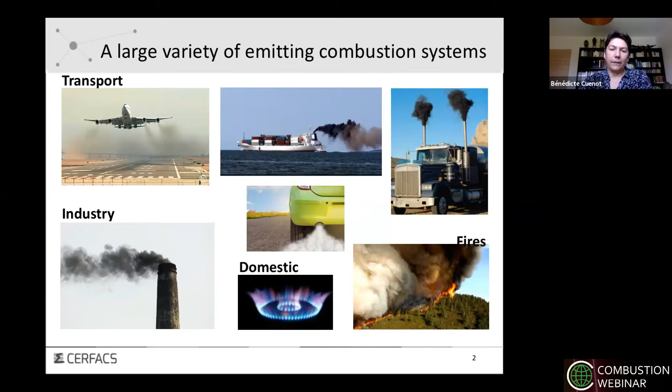We all know also the various environmental impacts. This is a point that I wanted to make today. It's probably clear for everybody, but just to make clear that in fact we have two types of emissions. There is one type that is more related to urban air quality, like nitric oxides, carbon monoxide, and so on. And we also have another important consequence on global warming and climate change. These are different topics, including different molecules—for climate change it is CO2, but also H2O to some extent. And of course soot is important for both aspects: it's a problem for urban air quality, but also for global warming.

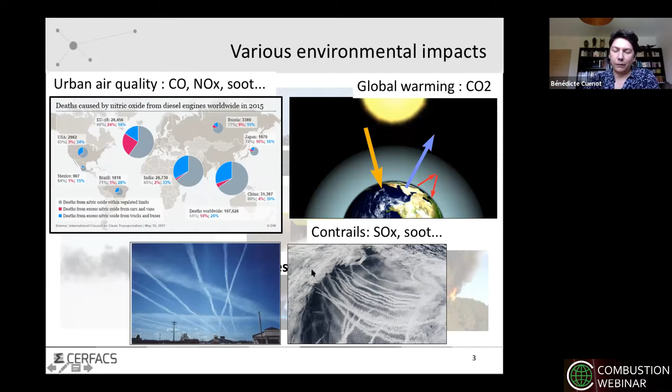Through what is called condensation trails, which I illustrate here at the bottom of the slide, you can see condensation trails from aviation here in the clear sky in the left picture. But something maybe not so well known is that boats—maritime transport—also generate condensation trails. As you can see here, I think it's the Pacific North Sea, you can see these traces typical of condensation trails. These condensation trails may increase sky covering and enforce radiation in the global Earth climate picture. So depending on what target, what type of problem we want to work on, we may have different solutions.

Of course, everybody works toward low NOx and low carbon, as we've seen—low NOx for urban air quality, low carbon maybe more for climate change. There are a lot of different technical ways to decrease combustion emissions, among which I tried to categorize a global classification. The first way is to work on mixing, how air and fuel mix together. It can be through staged combustion, as done for example for aviation engines, but it can also be through swirl or other types of injection strategies.

Another important way to decrease emissions is to work on the fuel nature. So, of course, H2—in France at least we hear a lot about H2 right now because it's no carbon, so it's very attractive. We also know it raises other issues, so it's not so easy to do, but it's considered. Ammonia is also very much discussed right now. And in a more conservative way, we also have a bunch of alternative fuels that have different compositions that may lead to decreased carbon emissions.

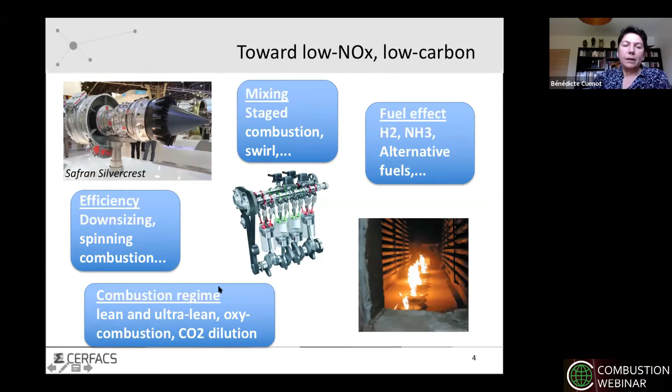So all these different techniques involve different physical phenomena that are in play in the combustion system, which I try to synthesize here in this slide.

Concerning mixing, the way you mix air and fuel is linked to the turbulent flow that is usually present in these systems, the flame structure, and the possible multiple combustion regimes it can lead to.

A major aspect, of course, is chemistry. We all know that just to predict something like flame length, you don't need very detailed chemistry to get a correct heat release rate, and so the correct flame length and shape. But if it comes to predicting pollutant emissions, that's another story, and you really need to go further in the chemistry description, and this is a major challenge.

We also have to take into account other complexities, like the fact that fuel in most systems is in a liquid state, leading to spray flames, and related physics like atomization and spray combustion, two-phase combustion.

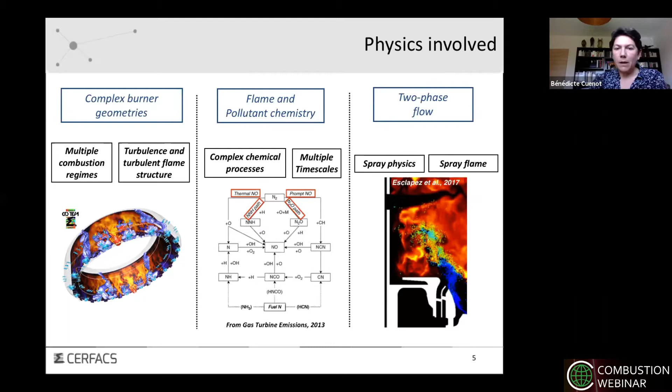So I will try to give an overview of what we do at CERFACS on all these physics and related modeling. One important aspect is that in our team, what we try to do is really obtain predictive trends. We want to be predictive.

We want to give useful answers to engineers. Useful answers mean either an accurate prediction or an accurate trend. This requires applying our models and simulations to very simple flame configurations, laminar flames, down to the most complex system, the true industrial system with all its geometrical complexity.

So it is very important for us to validate as much as possible on these more or less simplified configurations, with an intermediate level being lab-scale configurations where you still have good access to measurements for validation, but which are quite representative of the true industrial system, and then we apply this to the industrial system.

So this is what I will try to show in this lecture, how we develop and validate our models, to have confidence in giving correct solutions for true industrial systems. I will not show many true industrial applications because of confidentiality issues, but I will show a lot of illustrations in the first two categories.

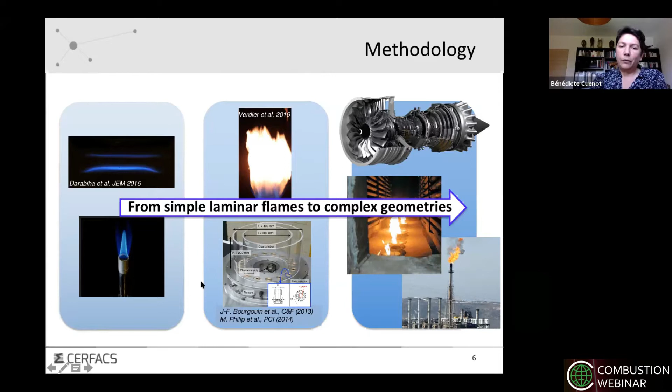All the simulations and results I will show today have been obtained with our in-house code developed at CERFACS, called AVBP, which has the necessary features to handle all these applications I've just mentioned. It is able to compute either external or internal flows.

It is fully compressible, because compressibility is a key feature for combustion instabilities and thermoacoustics, and it can work in both DNS and LES approaches. I will come back to that in a minute.

It handles complex geometries, so for that it uses unstructured meshes. It is highly parallelized with good efficiency. It is explicit in time with centered schemes to reach sufficiently high order, what we call high order—for LES, second or third order. And it includes a lot of models and numerical techniques, not all listed here, but I will give you an overview in this lecture today.

It has been applied to many different applications, all linked to combustion: gas turbines, piston engines, rocket engines, furnaces, and so on.

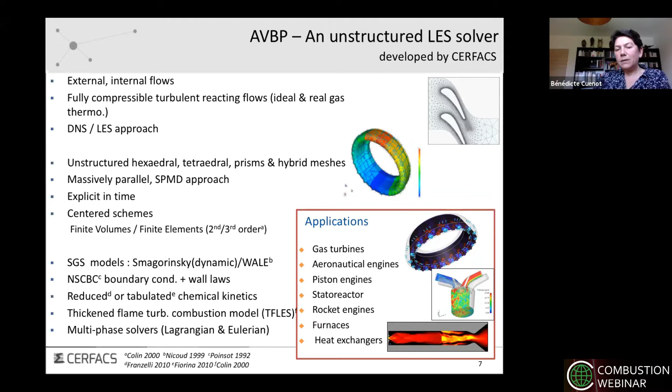So the first point we have to deal with is turbulent combustion modeling. The problem is the following: if we look at this image of a DNS, a direct numerical simulation of a turbulent flame, this turbulent flame has two kinds of scales.

We have scales related to the turbulent flow, as you all know—integral scales, Kolmogorov scales, and so on—and we have scales linked to the flame itself, the flame thickness and the flame speed.

And these scales allow us to describe the flame combustion, the flame-turbulence interaction, in this regime diagram shown below, based on two important numbers, the Damköhler number and the Karlovitz number, which make the ratio of these time and length scales.

Depending on the values of these two numbers, we can observe a large variety of combustion regimes, from very thin flame-let regime for high Damköhler numbers, to more homogeneous burning at the limit of well-stirred reactor for very low Damköhler numbers, which means slow chemistry with very fast turbulent mixing. So we need to take that into account to see first in which regime we are.

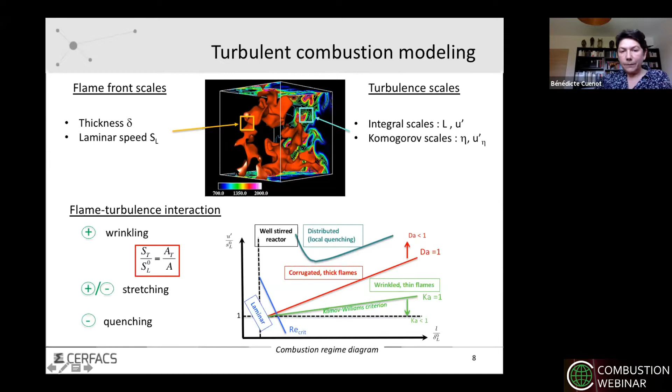Going back to the basics of turbulence modeling, I will not spend too much time on that because it's something that is now well established and known by the community.

If we plot the energy spectrum of a turbulent flow, we know we have a wide range of scales, which can be either fully resolved or fully modeled. In the averaged model approach, you model all the scales. In direct numerical simulation, you describe all the scales. And in large eddy simulation, you apply a filter at the cutting scale, denoted Kc, ideally in the inertial range, separating the scales you explicitly compute from the sub-grid scales that you model.

It has been well agreed in the community that for research purposes, the large eddy simulation approach makes a very good compromise between cost and accuracy. It allows you to simulate realistic flows and flames with sufficient accuracy in reasonable computing time, and for these reasons it's now widely used. Everything I show today will be in this framework of large eddy simulation.

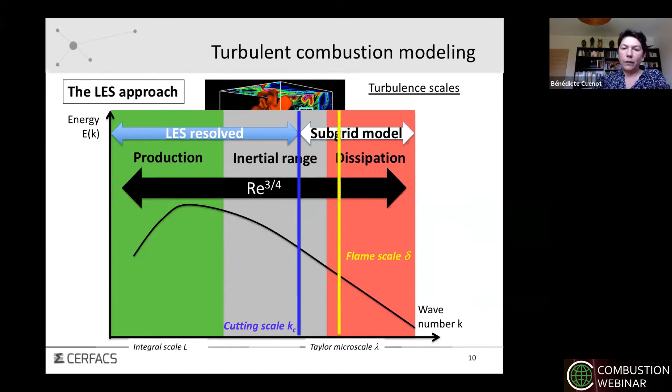I will not review all that today - it's not my purpose - but I want to show you one approach that we have successfully applied to many different systems, and this is the thickened flame approach.

In this approach, you take advantage of the fact that the flame thickness is proportional to the ratio of diffusivity to reaction rate, while the flame speed is proportional to the square root of the diffusivity times the reaction rate parameter. So if you realize that, and apply a thickening factor, so-called F, you can increase the flame thickness by a factor F while keeping the flame speed constant.

This is very interesting because it preserves the main property of the flame useful for design, which is the flame speed - this controls the flame length and burner efficiency. So this is something we really want to preserve, but the flame thickness is not something we need to preserve, and we can increase it to make it resolvable on the LES grid.

So with this trick, we are able to preserve the consumption rate of the flame, keeping the correct flame shape and response, while making it resolvable on the LES grid. This is a very nice feature of the premixed flames we used, and it allows us to resolve the flame front on the LES grid, even for flames with very small thickness.

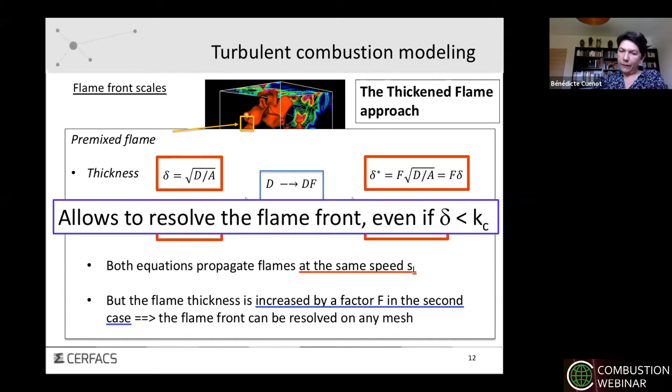This is typically what it gives you. If you apply that in a laminar flame case, you see here the temperature profile, in black for the real flame, and in red for the thickened flame.

You can see that the temperature profile is well smoothed down, so you have much increased the thickness. This is much less constraining in terms of resolution compared to the black curve.

If you look at the heat release rate, you have moved from a very steep and very narrow peak to a profile that is much smoother. But what is important to note is that these two curves, the red and the black, have the same integral, which means you have the same flame speed. This is exactly what is looked at, and this is what makes this thickened flame approach efficient for LES.

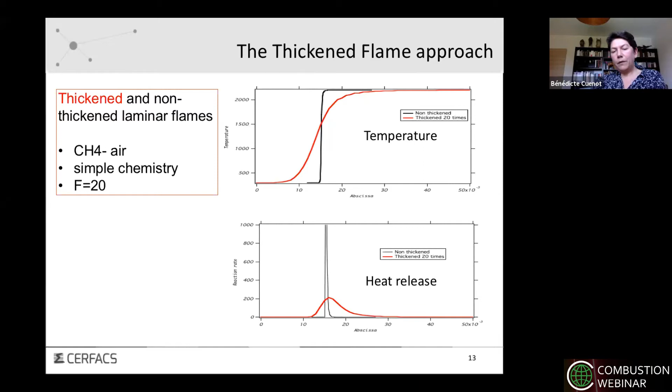Now you have not completely solved the problem, because in the previous slide I talked about the turbulent flame interaction, which is illustrated here. We see how much the turbulent flow wrinkles the flame front and then increases the combustion efficiency through this turbulent flame speed that derives from this wrinkling.

If you look at the thickened flame, like here, this is an example for a thickening factor of 5, you see that the flame front is much smoother. Of course you have increased the diffusivity, so this is expected. But going from F equal 1 to F equal 5, it's quite easy to see that you have lost a lot of wrinkling, so-called subgrid-scale wrinkling.

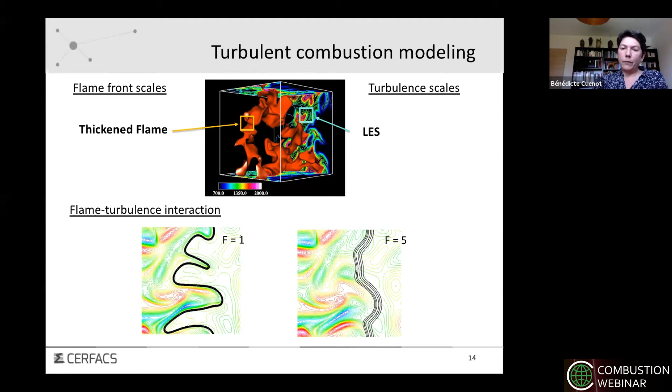So again, we need to do something about that. And this is where the efficiency function comes in. This is the other ingredient of the thickening flame approach, where you model the subgrid-scale wrinkling, the part that you are missing because of the filter and because of the thickening process.

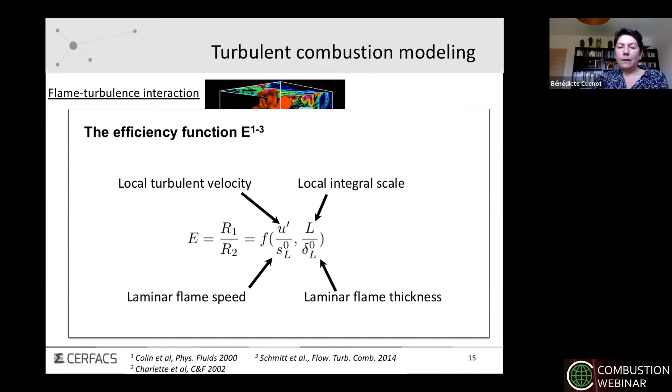You determine an efficiency function that is simply the ratio of the thickened and unthickened flame fronts, that you model with a function dependent on laminar flame characteristics and turbulent flow characteristics. I will not go into the details on how you determine this function and how it looks, but what is important to remember here is that you apply this efficiency function to, again, the same quantities.

Diffusivity and reaction rate. Note here that you apply them differently. The diffusivity is multiplied by the efficiency, but the reaction rate now is also multiplied by the efficiency, because of course the turbulent reaction rate increases, since you want to increase the flame speed from laminar to turbulent value. And this is what E does here.

So now you have a complete model that is able to resolve a turbulent flame on your LES grid to recover the correct turbulent flame speed. But then you have to make sure that your simulation is correct also outside the reaction zone.

If you apply this F and E everywhere in your computational domain, you know that in non-reacting zones, if there is mixing, then if you apply this diffusivity correction, you will diffuse too much. So it's very important to apply these two factors only in the reaction zone.

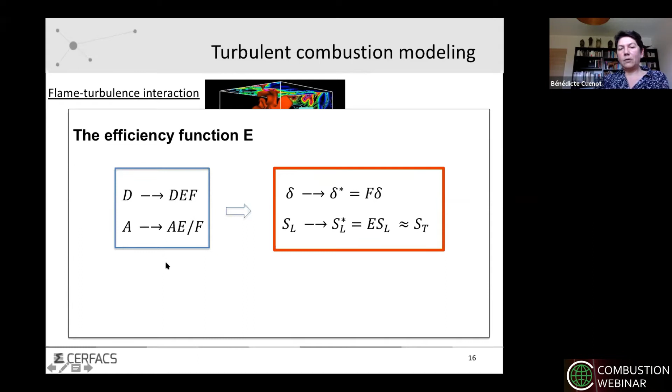So this is where the dynamic thickened flame model arrives. You apply this F factor only, and also the E factor only in the reaction zone. This reaction zone is identified with a sensor S, which is able to exactly identify where you have the flame front, and then you apply this thickening only at the flame front location.

The final equation that you get in your CFD solver is the one here. For example, for a mass fraction, you see that you have the E and F factors and the sensor here. You don't need the sensor for the reaction rate because it naturally goes to 0 outside the reaction zone. And you see that you apply the E and F only where the sensor is equal to 1.

And if the sensor is equal to 0, then you can easily find that you end up recovering the standard LES equation for transport of scalars in a turbulent flow, with turbulent diffusivity here.

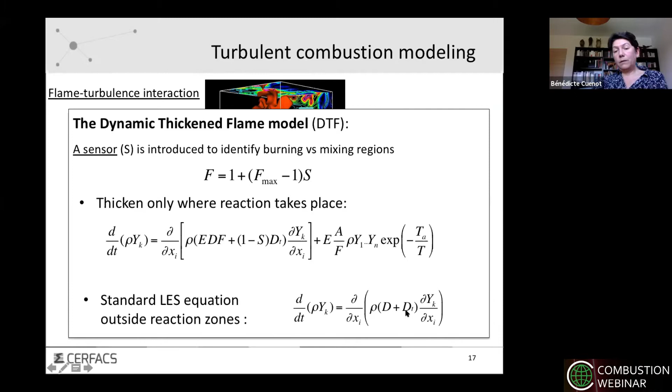Now, how can we obtain this sensor? This is a very tricky part of the model that is not so much talked about or discussed in the literature, so I take the opportunity today to discuss that a bit.

It is not so easy to find a universal, let's say, definition of the sensor, because if you think again about the complexity of the flames that we can have in real systems, with complex fuels, complex chemistry, possible liquid fuels with droplets, varying equivalence ratio, and so on.

Determining exactly where the flame front is located is not so easy. So we have recently developed a technique, an algorithm that is able to automatically detect the flame front in any kind of simulation, and also determine the correct thickening that has to be applied. So how is that done?

It's based on two ingredients, let's say. The first step is to identify the location of the flame front. This is quite easy to do if you realize that the flame can be identified with some kind of shape of the profile of some quantities. Typically, this could be the heat release rate or fuel consumption rate also. So this particular shape of this source term is clearly a marker of the presence of a flame.

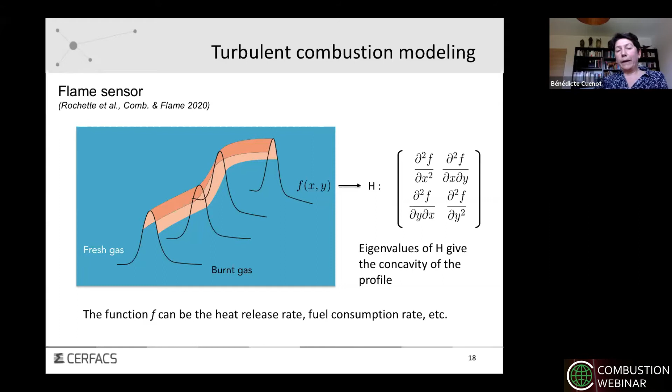And what you want to detect is the maximum of this function, to locate the position of your flame front. To do that, if you accept this assumption that the flame front is located at this maximum of this function, it is quite easy to identify by simply calculating the Hessian matrix of the function you have chosen, the matrix of second derivatives, and realizing that the eigenvalues of this matrix give you the concavity and the directions of concavity of your function, therefore giving you an indication of whether you are on a peak or not. So by simply calculating this Hessian and taking the eigenvalues, you can identify where your flame front is located.

Then the second step of the automatic thickened flame model is to determine the thickening factor. For that, again, we want to rely on the simulation itself rather than a priori values of the flame thickness, because if you think of spray flames or non-homogeneous equivalence ratio or other complexities in your configuration, there is no such thing easy to define as one flame thickness. So we thought it would be more accurate to rely on the flame thickness evaluation that you have in your simulation.

So once you have detected your flame front, you can look at the transverse profiles of this flame front. This gives you this kind of shape. Again, this is an F function, so it can be a heat release rate or any other source term that you choose to mark your flame front. From that, you can calculate a thickness.

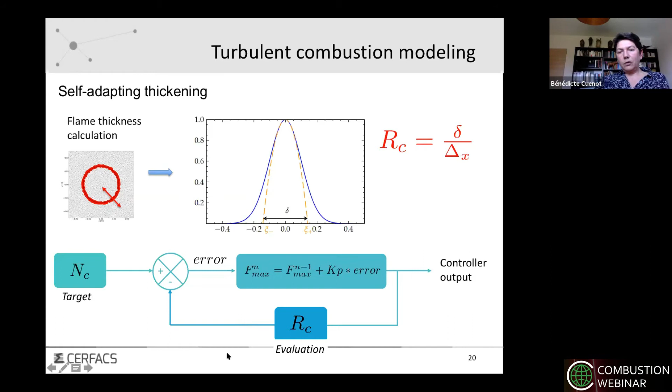I will show you an illustration right now. So we first apply this algorithm to the Volvo case. Maybe some of you know it.

It's just a flame stabilized behind an obstacle, like illustrated here. It's a configuration that has been computed by many groups. It's quite well known, and this is what you get.

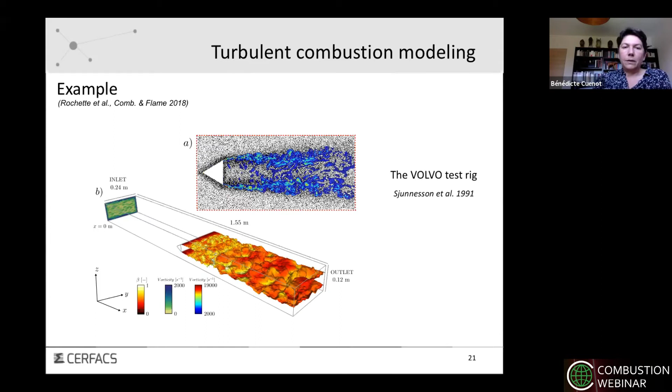This is the front detection. You see that the algorithm, this is a result of the eigenvalues of the Hessian matrix. You have the points here that are identified by this algorithm, this Hessian matrix, and it follows quite well the reaction rate.

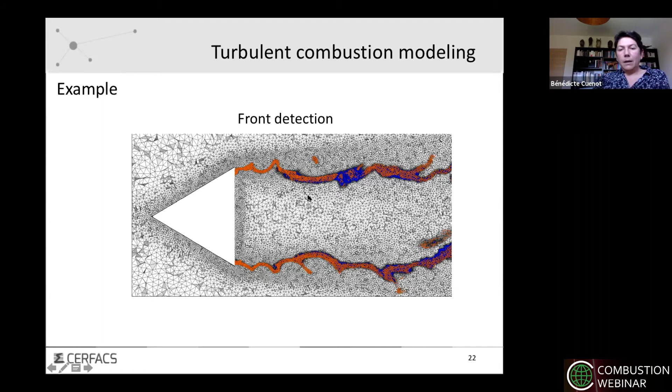And this is the thickening that has been obtained automatically. The user only asked for 5 or 6 points, I don't remember exactly, but this is the order of magnitude to be inside the flame front. And then the algorithm automatically found the right value of the F factor to satisfy this resolution constraint.

So this is something that is quite recent, but it's really improved a lot our results, especially in the case of spray flames, because spray flames have very different behaviors compared to gaseous flames, and there is no such thing as one thickness or one flame speed for a spray flame—or there is, but it is not easy to know a priori. So it is very important to have an algorithm that is able to identify this value by itself without any input by the user.

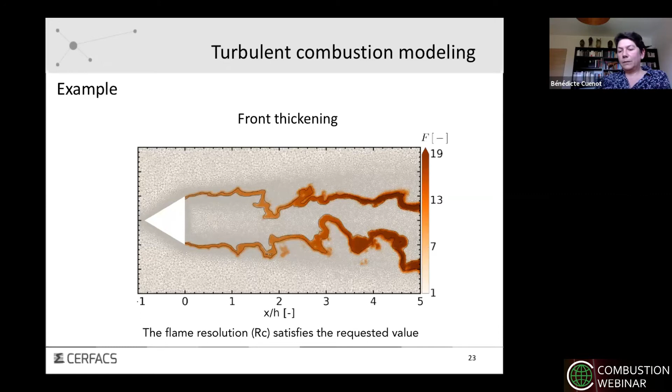This is another case. I told you at the beginning that we validate our models on a series of test cases. The Volvo case I showed before is a very simple case. This is a more realistic case, the SGT 100 case that has been used by many groups for validation, but it has more complexity, in particular swirl flow as found in real engines. It is important to check that the algorithms work well on this kind of configuration.

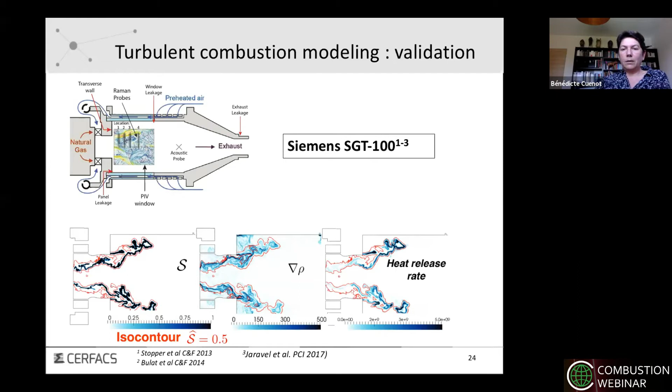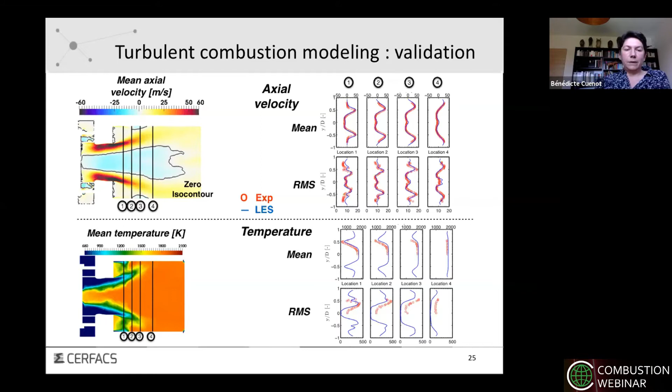So you can see here the sensor following well the heat release rate. This is something that has been well established right now. Just another illustration of the validity of the whole concept, where you can see velocity, but also temperature—excellent agreement between measurement and simulation. So we are now able to reach a quite high level of accuracy on this kind of boundaries.

Now I come to the very big challenge of chemistry. As I told at the beginning, we are not satisfied with only having the correct flame speed of a flame. We want a detailed, at least some chemical description that gives us access to the pollutants, because this, as I mentioned at the beginning, is a major preoccupation now.

So the slow time scales may be an issue for modeling, but maybe not for numerical robustness and stability. But we also have scales that are much smaller than the flow time scales, which means that if you are in an explicit integration scheme, you need to reduce your time step drastically to resolve these scales. So this is a true difficulty.

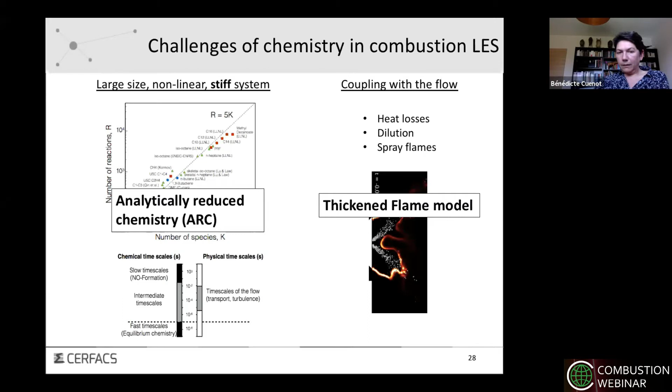And for that, we have applied this reduction approach, which is called analytically reduced chemistry. It has been developed for a long time by people from chemistry, and it allows us to obtain reduced schemes that are still quite accurate, and in which you reduce the stiffness. I will give a short description of that now.

You can find the details on this website, where we provide reduced schemes to the community. You can find download schemes there. The idea is to derive reduced schemes from a detailed mechanism.

And then we apply this quasi-steady state assumption, which eliminates the very stiff species. So it has both advantages: it eliminates species, reducing the size of the system, and it also reduces the stiffness. This is exactly what we want for our simulations.

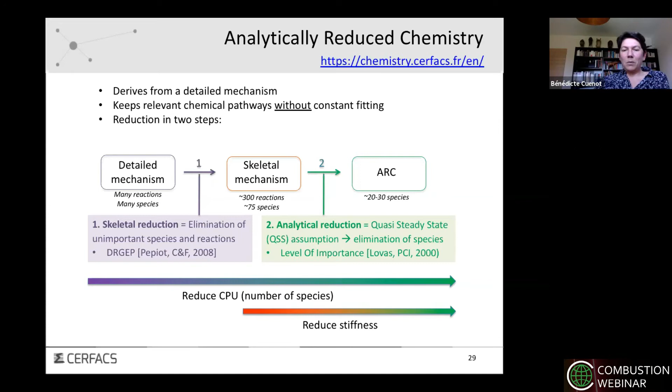So the good news is that you can do that automatically. Again, as I said, we're not chemists, so we don't know so much about chemistry, but these algorithms that we took from the literature are very autonomous in a way. They do the good job by themselves. They're able to automatically apply the DRGEP mechanism, determine the least important reactions and species, and then also determine the quasi-steady species.

So we have implemented that in a code that we call ARCANE, that makes this reduction automatically. It is linked to Cantera for the associated flame calculations. And then the user just has to give a detailed chemical scheme and give some targets like flame speed or some species or temperature profiles.

And also give his own tolerance on this target. And then the code does the whole job, and provides you a reduced scheme automatically.

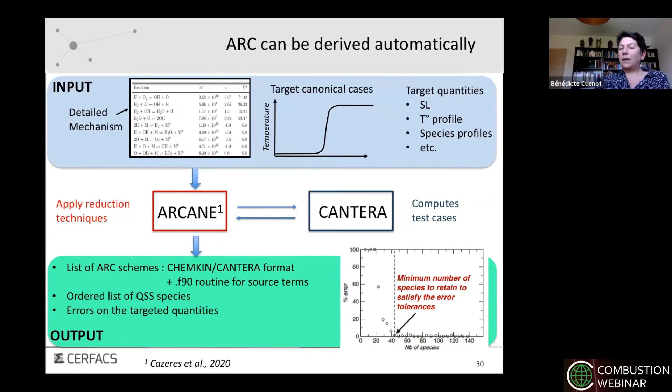Okay, there is not much uncertainty on this, and this is my understanding of why the automatic procedure works so well. It's because it's quite clear when you have dropped a species that is too important. Mathematically, it is quite clear to determine. So that's why the algorithm has no difficulty making it.

We have applied this approach to complex fuels. This is work that has been done in the framework of a European project, JetScreen, to see fuel effects. I chose illustrations here on some projects that are, of course, linked to emissions, because this is the main topic of my talk today.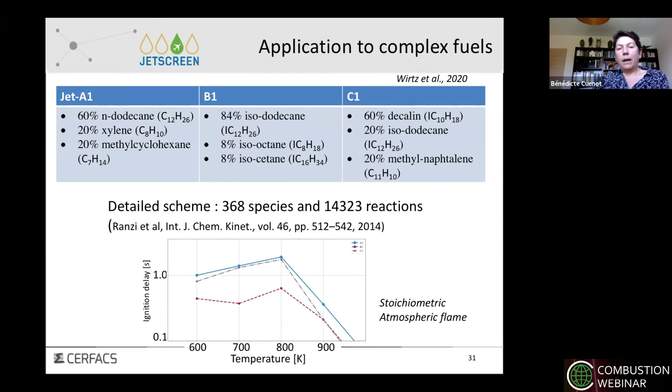These results on ignition delay have been obtained with a detailed chemical scheme that comes from the University of Milano. Then we applied our Arcane code reduction algorithm to that, and this is what we obtained.

So we quite easily obtained, even for these three-component surrogate fuels, reduced schemes that were not too difficult to obtain. You see, we went from 368 species to only 36, with, of course, quasi-steady state species, and a reduced number of reactions for Jet A.

And with a good prediction of ignition delay and flame speed. But also for the B1, where we end up with about the same order of magnitude of species, about 31, with also good agreement between the detailed and reduced schemes in terms of ignition delay and flame speed.

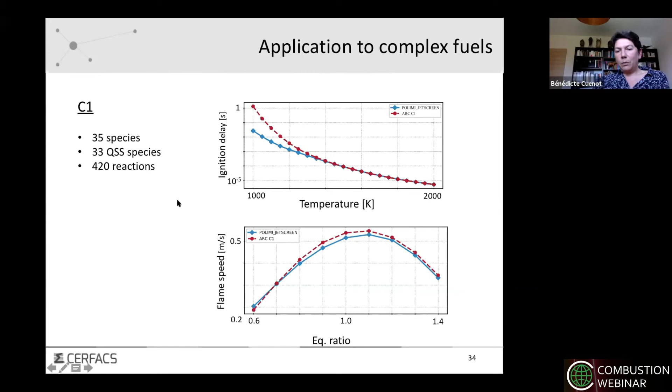And finally, for the C1, which is a bit more complex. You see that we have more difficulty matching the ignition delay for low temperature. So C1, in our experience, was a bit more difficult to handle, but still we had something satisfactory. And then we could apply these reduced schemes in a configuration that comes from DLR.

You have an illustration here of a standard swirl flow, swirl flame. What I wanted to show here today was this plot, where you have the temperature at different heights for the A1 and B1 fuels.

You see that we can recover this if you compare with experiments. Experiment is here in the blue circles and empty circles, blue circles and red square, to be compared with the full filled blue circle and red square. You can see that we're not exactly on the curves because there are other uncertainties, in particular linked to the liquid injection, but we could recover some trend of the fuel effect with an increase of the temperature.

With the fuel, so this is very encouraging, and these are very small effects. Even in the experiment, they are very tiny effects, but we were quite happy to see that our chemistry was able to recover this trend.

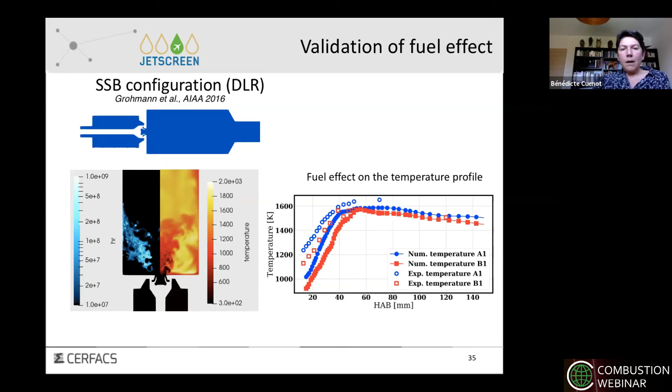Now I will go to, I think I have to speed up a bit, to two-phase combustion. Two-phase combustion is very complex because it involves a whole bunch of new physics like atomization, injection, evaporation, interaction with wall, and of course turbulent dispersion.

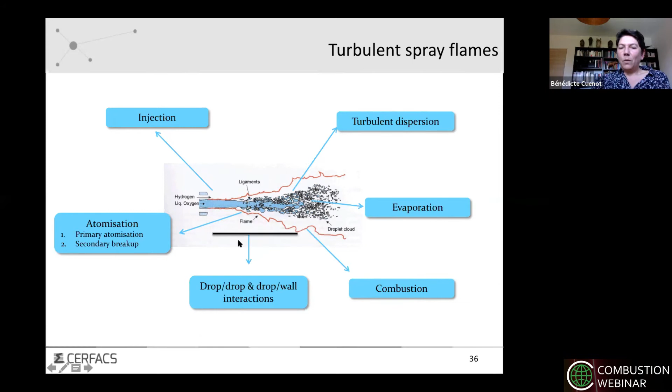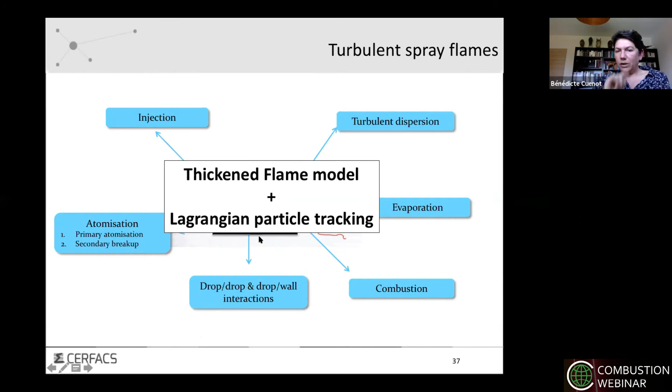So again, we still want to apply our thickened flame model here, but we now add a Lagrangian approach for the particles, for the droplets.

It is important to really capture important effects in turbulent spray interactions. This is illustrated here with this animation of droplets transported in a homogeneous isotropic turbulent flow, where you can see that there is a tendency of the droplets to concentrate in low vorticity regions. This is very important to capture in a turbulent flame computation, because it means the fuel will be concentrated in some particular zones of the turbulent flow.

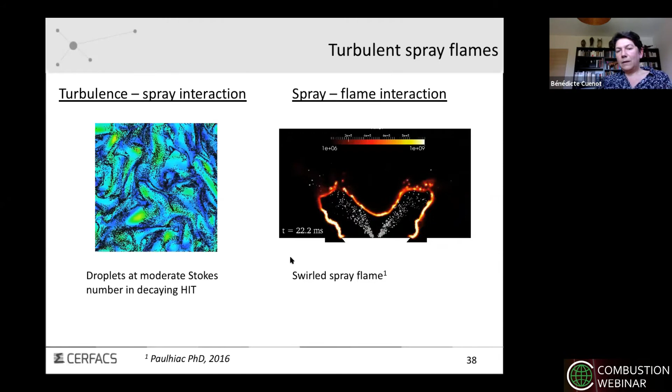Another nice illustration of the complexity of turbulent flames is given here, where you can see a spray interacting with a flame front. You can see how some droplets evaporate before the flame front, ahead of the flame front, to feed this flame front, but some are able to cross the flame front, and some also burn as individual droplets in the burnt gas zone. So this is a very complex flame structure that has to be represented.

To go back to modeling, one important thing is the question of what is the laminar flame speed of a spray flame. Fortunately, this concept still holds for spray flames, you can still measure a flame speed for any kind of spray flame.

But what is interesting is that in the rich zone, you may have a flame speed that is higher compared to gaseous flame speeds, which is maybe not so intuitive, because you would say that evaporation introduces a delay, so you would expect lower flame speed.

And this is exactly what the Ballal-Lefebvre correlation, which is much used, says. This correlation just introduces the evaporation in the picture, and then always gives you a lower flame speed. So this correlation is good for the lean zone, but not for the rich zone.

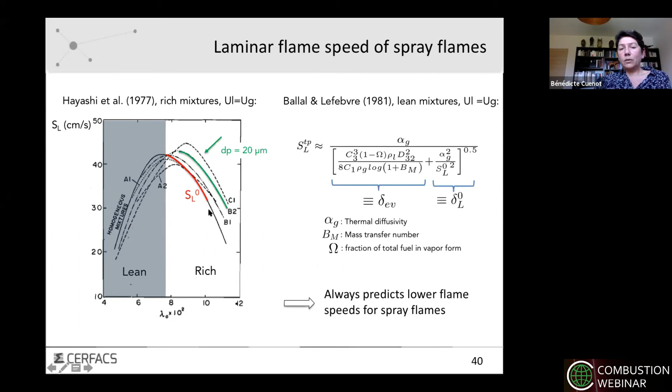This can happen in very rich cases, or depending also on the diameter of the droplets. The evaporation is not complete, which means that the equivalence, the fuel amount that the flame burns, is not the fuel amount that you feed the flame with.

And if you are overall rich, and go back to the flame speed curve with equivalence ratios, you see that you move from a very rich point, your nominal equivalence ratio, but what the flame sees is a lower equivalence ratio because again, the fuel has not fully evaporated before the flame front. Therefore, the flame speed increases because you come closer to stoichiometry.

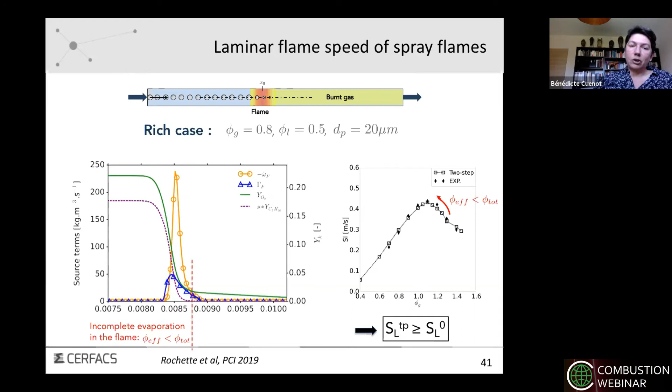And this is exactly what happens, and this is what explains the higher flame speed in some situations in overall rich spray flames. Once we realized that, we proposed a new correlation for the flame speed of this spray flame, where we introduced an effective equivalence ratio, taking into account the fact that you may not evaporate the whole liquid before the flame front.

If you look at the comparison of flame speed obtained, measured from simulation and taken from the correlation, you see that we have a good match in the lean case, which is also not so bad for the Ballal and Lefebvre correlation. As I mentioned, for lean cases this works well. But for rich cases, the correlation is really able to describe this increased flame speed, when evaporation is not so fast.

You can also see another feature that we have studied here, which is the impact of the slip velocity between the droplet and the gas, because this also impacts a lot, of course, the amount of evaporation inside the flame front. It has a lot of impact on the flame speed, but I will not go into details into that now.

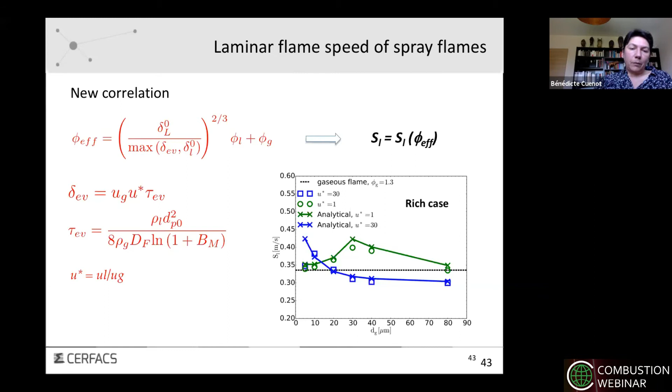The main message here is that the flame speed of a spray flame is not something that is easy to determine a priori, and for some modeling approaches it can be a difficulty.

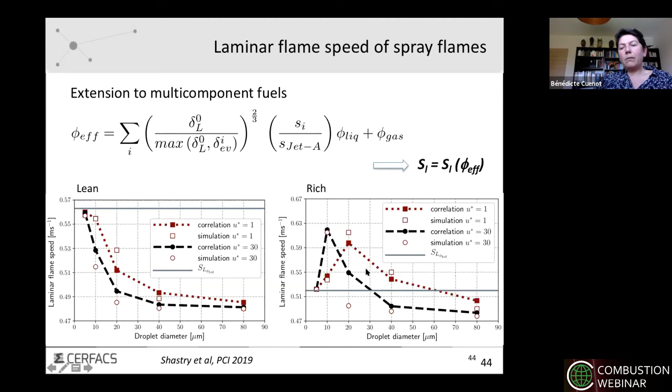We extended this correlation to multi-component fuels, typically those that I showed previously. You just take into account that you have several evaporation characteristic times, and you can see that again you have, also for rich cases, this increase of flame speed, and the correlation is able to capture it.

Now, how should we apply our thickened flame approach model to spray flames? The issue is the following: we have in a spray flame evaporation and reaction, and the balance between these two gives you the final flame structure.

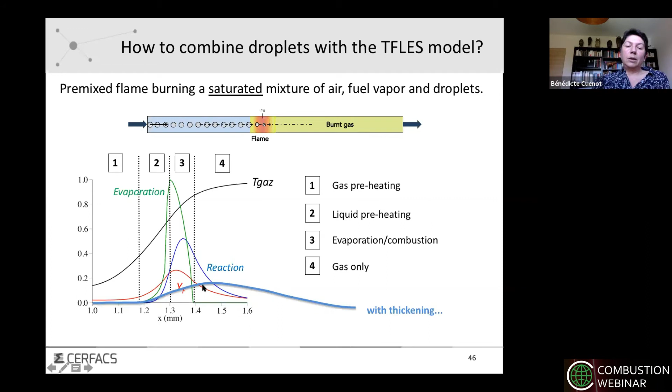Now, if you apply thickening to the gaseous part of the flame, the reaction zone is modified as shown here, and you see that the relation between evaporation and reaction changes a lot. So this means that you have to do something about evaporation also, and this is illustrated here.

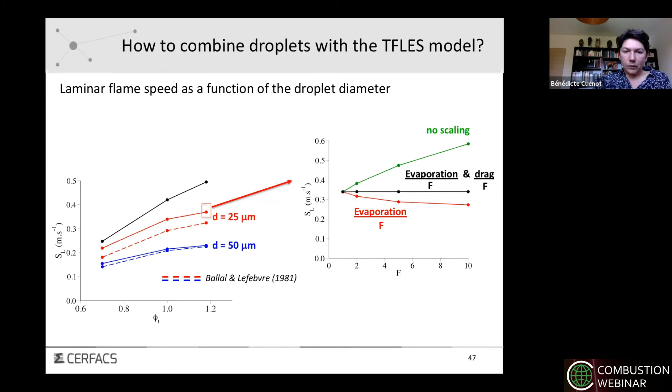So this means that when you do spray flames, you also need to apply the thickening to the exchange terms between the two phases. This is also an important note for this modeling system.

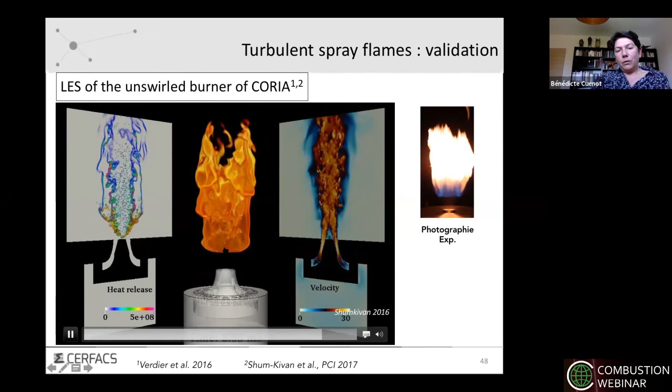So with that, we are able to compute spray flames like this one shown here, which is a test case from a configuration from CORIA that has become a test case. Many groups have computed it, and with this approach we're able to obtain the correct flame structure and flame liftoff. We are able to really go into much detail in the flame structure, and in particular the way the spray flame is stabilized with various zones, describing the very complex spray flame structure.

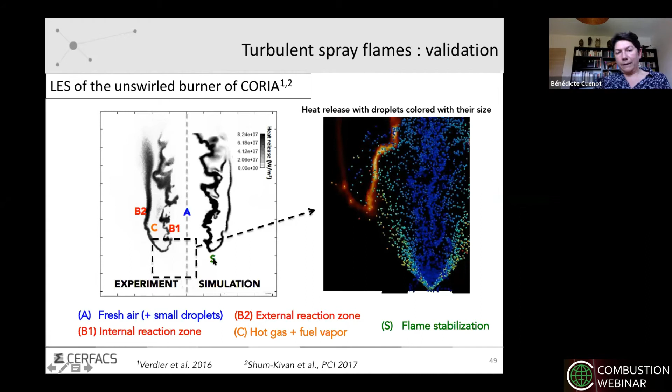Where, for example, in zone A here, you have air with small droplets that behave very differently from zone B2, which is an external reaction zone with a lot of pre-evaporation and so on. You see this really specific flame structure is well recovered by the LES with the model that I have just presented.

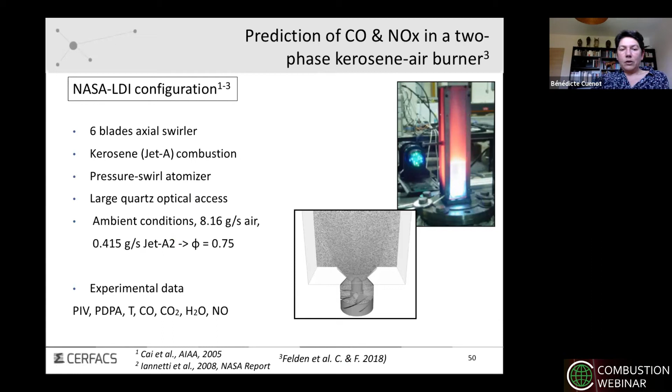So with all this, we can predict emissions. Just an illustration on one configuration, another LDI configuration which you can find in these papers. Again, it's a swirled flame with kerosene, on which there was some nice measurement of emissions, CO, CO2, and NO. So we applied our thickened flame approach with a Lagrangian solver for the droplets and chemistry, analytically reduced chemistry.

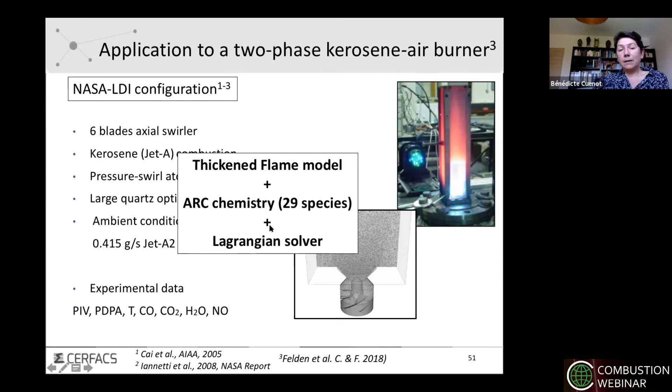This is just to show how it looks like. This is quite standard, a swirled spray flame. This is to show some validation in terms of temperature and products. You can see here already the CO profiles at various heights above the burner, and you can see the good prediction of the CO.

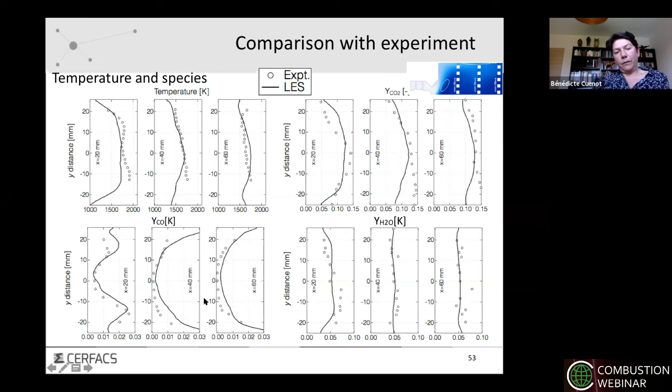It was interesting also to go into more detail in this CO field. In particular, we could see that this particular shape of the CO, with some peaks here around the sides, was really linked to some particular chemical processes that occur close to the cold walls. This was very interesting to observe, and only our thickened flame approach with explicit chemistry naturally captures it, without any further modeling.

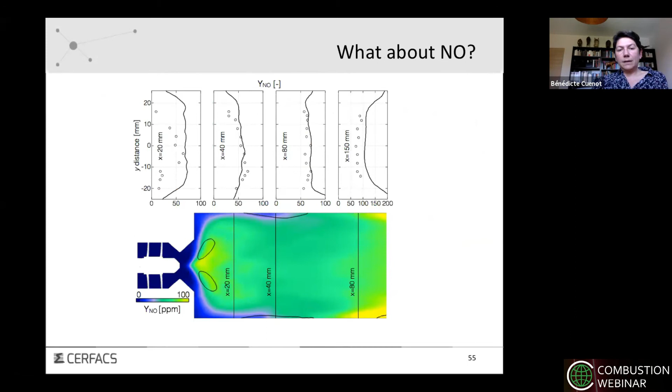For NO, again, we had also a nice comparison, so we were quite happy with these results, demonstrating that with the model I have presented, we're able to predict these pollutants. I will go now quickly.

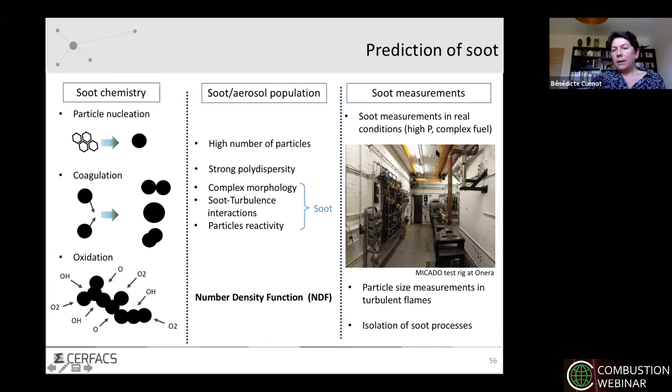We also know that we need to describe the soot particle population because we have a high number of particles, which can be a difficult challenge, and we have a strong polydispersity. So this population is usually classically described with a number density function. And of course, soot measurements are a key point in our approach.

The only thing I want to show today is that it is possible to predict soot with the Lagrangian tracking approach. You can find in the literature a lot of work on sectional methods or methods of moments to describe this soot population, the idea being that describing the trajectories of all soot particles would be too costly. In fact, we have developed an algorithm and methodology that makes Lagrangian tracking more computationally efficient than sectional methods or methods of moments, if it is to correctly capture the soot particle size distribution. We took chemistry from the literature without detailing it too much, and mostly developed this Lagrangian approach.

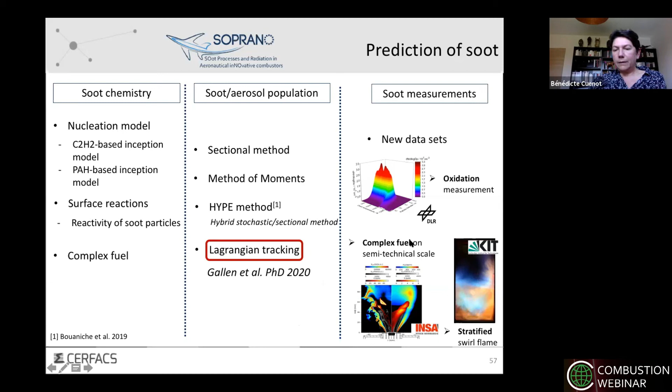I want to also mention the Soprano project, a European project, in which new data sets could be produced that could be interesting for the community to better characterize soot oxidation and the complexity of soot evolution, and also the sensitivity to the fuel nature.

I just want to say a word about the Lagrangian tracking. There are two main points to consider. The first is about collision. You cannot describe all individual collisions between pairs of particles because it would be too costly. So for this part we use a stochastic algorithm. This is quite standard, a stochastic algorithm for collisions that you can find in any code for simulating droplet or particle populations.

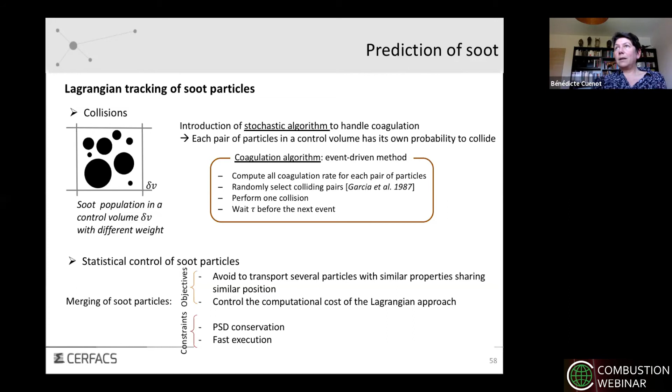The other important feature is to control the statistical convergence of your population. You have to make sure that in each cell of your simulation you have enough particles to be statistically converged and get correct results without increasing your computational costs too much. This means you have to apply merging and splitting procedures to control the number of particles per cell that you want to keep in your whole simulation.

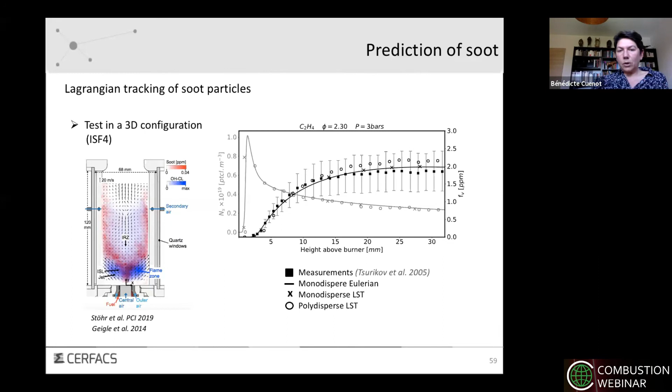With that, we were able to make predictions of soot in the burner from UTIAS, which also uses Jet A1 as a fuel. In that case we have two kinds of populations: droplets for the fuel and soot, so you have to distinguish between these two. We also had to adapt the chemical description because we had the complex fuel Jet A1.

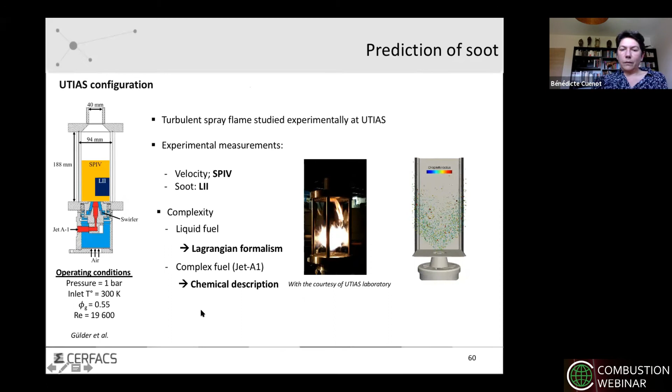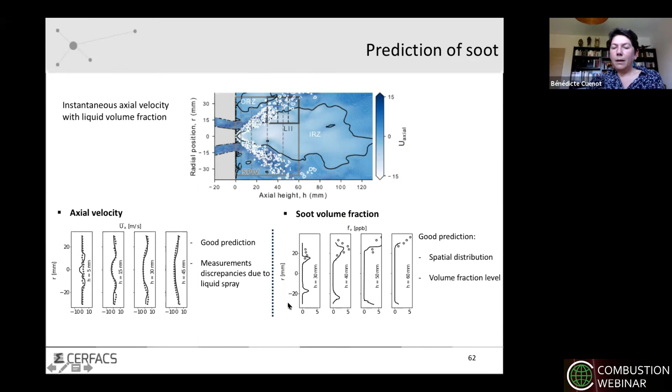The lines are the prediction, the simulation, and the symbols are the measurements. You can see that we were able to obtain the correct location and levels of soot. So these are very encouraging results.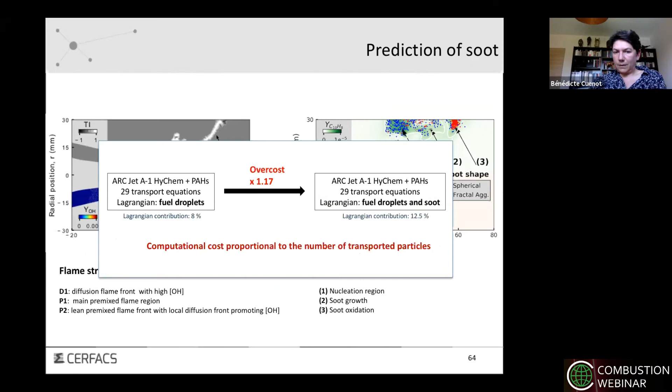In terms of computational cost, we could observe that the Lagrangian approach, if you do it with the correct and efficient handling of the numerical particles, has a very small overcost, much smaller compared to any method of moments if you want to capture the correct particle size distribution. So this was quite satisfactory also.

So now it brings me to the conclusions. Just to conclude, we have a methodology based on large eddy simulation, including semi-detailed chemistry, a Lagrangian approach for the liquid fuel and soot, that is able to describe turbulent, gaseous, and spray flames, to predict pollutant emissions, and also transient behaviors that I will illustrate just after, in complex geometries.

From that, it is possible to couple these simulations to other physical effects like thermal radiation, conduction, or electric fields, or whatever. So this is something that will probably come in the future.

Of course, we still have to work on some aspects. Typically, soot chemistry is something that is still far from being sufficiently known, but we have the tool to include more accurate or more detailed soot chemistry in the solver. Multi-component liquid fuels still remain to be studied. We are just at the start of it, as well as the reduced chemistry for fuel blends.

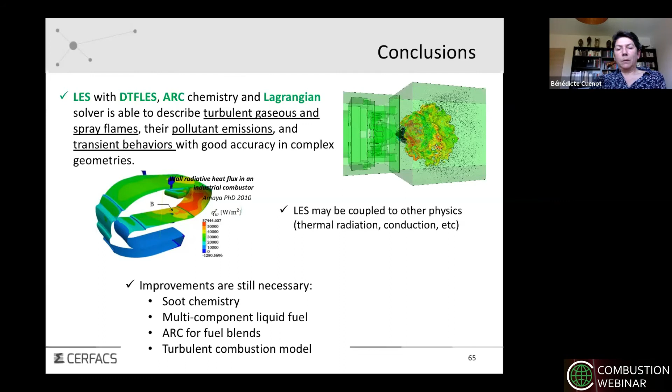We also need to continue the work on turbulent combustion modeling, because you may have noticed that when I spoke about the thickened flame approach, I spoke mainly about premixed flames. But we know that with the change of fuels, typically if we switch to hydrogen, we may see more non-premixed flames, which also happen more in spray flames in 3D complex geometries.

Just to finish with a nice movie, I wanted to show what LES allows for transient cases. This is an ignition of a spray flame in an annular burner, a lab-scale annular burner. So this gives an idea of what can be done.

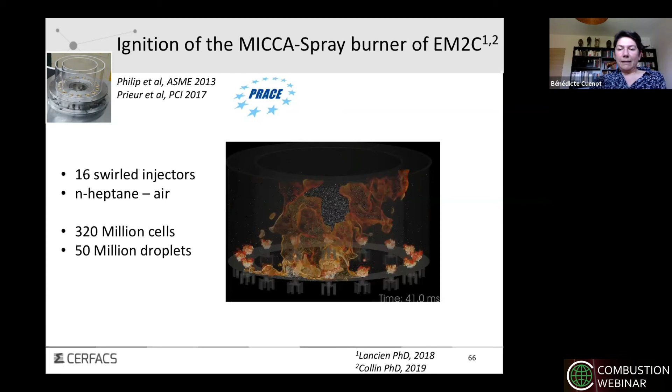You can see the simulation nicely reproduces the flame propagation to the whole burner. This is very important and very interesting for application. It does not give only a nice movie, it also gives quantitative good results compared with the experiment. The images here compare the simulation and the experiment at the same time, and here in this plot you can see the time of ignition of all the different burners, and you can see that we have a very good match.

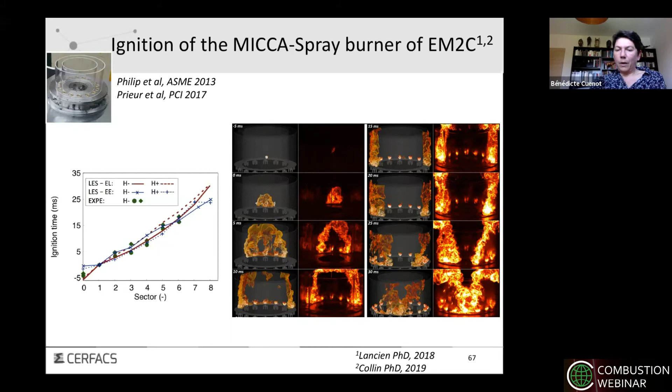So these tools, this LES approach with all the models that I mentioned, are very powerful and open the way for many, many studies of different situations.

And this ends my talk for today.

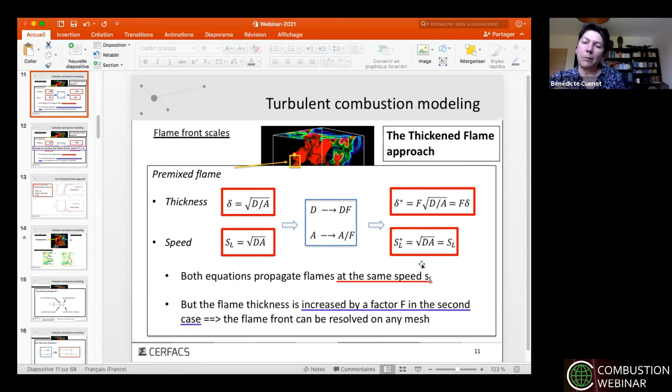This is something we found very useful, because with this transformation, you can do your computation of the flame on your LES grid, and it will be stable numerically, it will be resolved. Then, of course, when you do that, you have not correctly modeled the subgrid scale effects - the fact that you have some smaller scale interaction between the flame front and the turbulence.

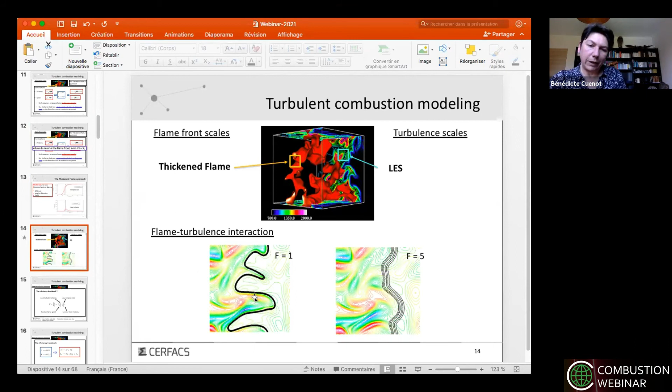This is where the efficiency function comes in, which allows us to recover what happens at the subgrid scale, and you apply that again to these two quantities, D and A. So you can show that this efficiency acts again as an increase of diffusivity, like turbulent mixing, and also increases the reaction rate because the wrinkling increases the turbulent flame speed compared to the laminar flame speed. This is exactly the role of this efficiency function.

So, is that clear enough? Yes, I think that is enough. If you want to know more about this, I think we can refer to our website where you can find publications where all these models have been presented.

The next question is from Professor Jay Gore. The first question is still on the thickening flame model, actually in its application for spray flames. The problem in spray flames is that you have multiple equivalence ratios, so you have partially premixed combustion. How do you handle that in the thickening flame model?

Linked to this question, there is also another question from Professor Gore: do you observe double flame structure in spray flames? And is the thickening flame model able to correctly capture these complex flame structures?

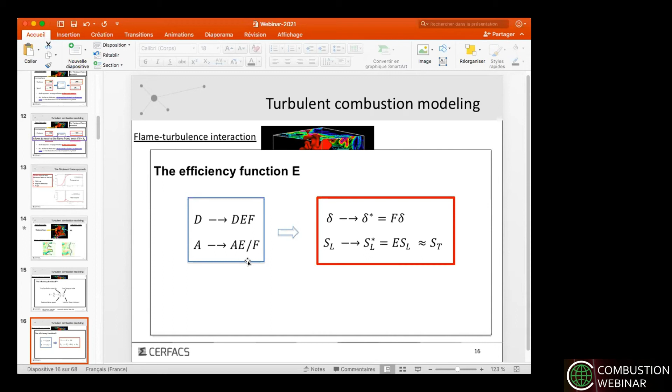So, in fact, the thickened flame model has no difficulty in describing spray flames because combustion always occurs in the gas phase. Imagine you have droplets, they evaporate, then you have a heterogeneous equivalence ratio - no problem, the thickened flame will see it. You don't need to do specific treatment for that, provided you have correctly determined the thickening factor, as I just showed in my presentation.

So does it capture the rich flame and the lean flame you described, a double flame structure? You mentioned there were two different flame speeds, and sometimes the flame speed was faster than the speed corresponding to the overall equivalence ratio. Is that complexity captured by the thickened flame model - that sometimes there can be two different flame speeds, one faster than the equivalence ratio of the mixture?

Yes, exactly. This is the advantage of the thickened flame approach, because you do not pre-assume the flame structure. You just thicken the flame front, but then you keep the reaction source term. So if the reaction source term sees a rich zone locally, it will burn as a rich zone, and in the neighboring cell, if it sees a lean zone, it will burn as a lean zone. So yes, it effectively captures this very interesting effect of spray on the flame speed.

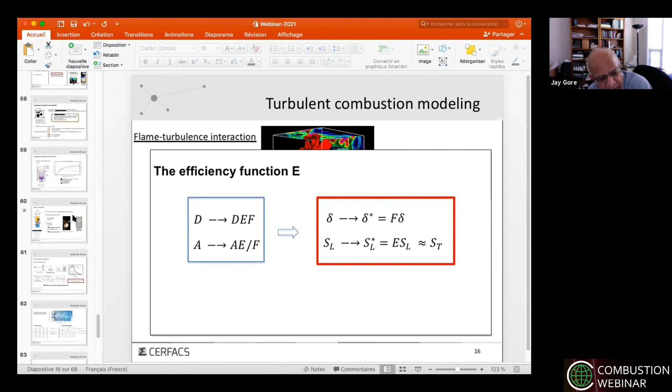This was related to the soot, and I noticed that the measurements of the soot in one of the very late slides showed parts per billion level soot volume fraction, and then in the computation slide, it showed parts per million. So I just wanted to understand if the resolution for measurements as well as computations is at the parts per billion level or at the parts per million level.

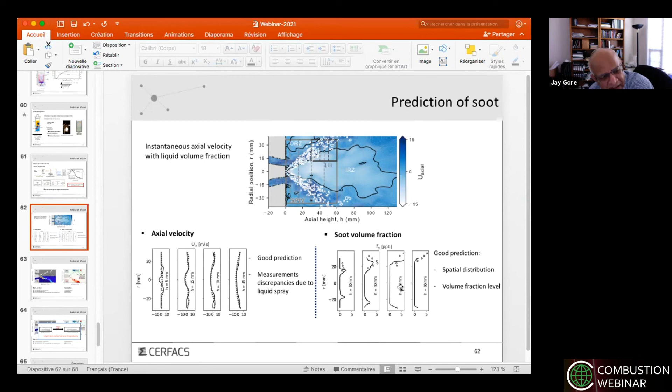In that case, it is part per billion. Yeah, so the computation and the precision of the measurements is in the parts per billion range now for this particular case. That's wonderful, because earlier slides showed parts per million, for an ethylene case. Maybe I have to check again if there is no mistake. Frankly, from now I cannot say more about that. So this is an important thing, because a factor of 1,000 - whether the precision has improved by a factor of 1,000, or the emissions have decreased by a factor of 1,000, both are very good advances. Thank you.

Thank you. So the next question is from Dr. Zhanglong Zhu, and he was interested in your pressure swirl configuration, your spray flame configuration. How do you fix the droplet size and droplet size distribution and velocity? So how do you handle injection?

Yes, okay, I didn't talk at all about injection and atomization. This is a very interesting question, of course. This is, I would say, one of the main weaknesses of our simulations right now, frankly speaking, because we do not have at the moment any model for atomization. We are working on that, but it's not yet in place. What we do for the moment is put in the simulations the knowledge of the spray we have from experiments. Typically we take the droplet size distribution and velocity that we have from measurements. If we don't have these measurements, then we take some standard shapes of the droplet size distribution and velocity based on very simple concepts and correlations.